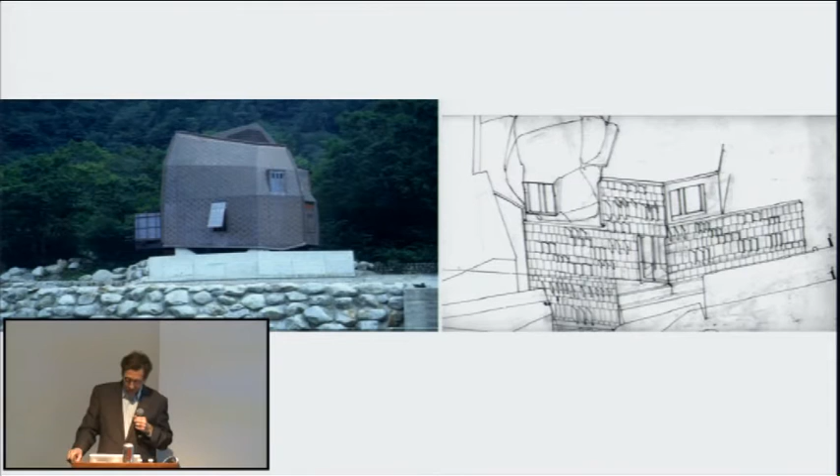In 2004, he was celebrated with the Annie Spink Award for Excellence in Architectural Education, which he received that year, and in 2012 he was awarded an honorary fellowship of the RIBA, and he's currently Professor of Architecture at the Welsh School of Architecture in Cardiff.

In the 1980s, Peter and his collaborators, who included Chris McDonald, Jeanne Sillett, and others, created an iconic set of projects that many of us first learned about the AA through. They were published and widely disseminated.

In the early 1990s, he built his first works in Japan, the Osaka Folly Pavilion and other projects which people in this room contributed to.

And he's back here this week, I noticed, on TS Week at the AA, which is the week in which everybody starts to get technical in their language and expression.

But the point I'd make is I think Peter, probably more than anyone, embodied the idea that a technical consideration of architecture is always and should be embedded in the projects of a studio and unit. Technical considerations aren't something to put off on the side in a department or laboratory, as other schools do, but the opposite: to embed that thinking within a project and a unit. What you're seeing tonight in his own personal work is an extension of a way of thinking and learning architecture that Peter remains a remarkable leader and example of. Please join me in welcoming Peter Salter.

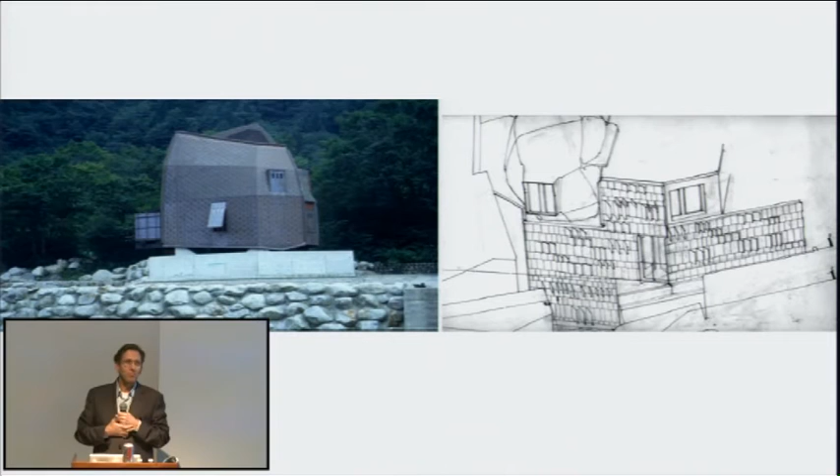Well, that's an introduction. Thank you very much, Brett. I'd like to thank the AA for inviting me to be here. It's very good to be here. This seems more like a reunion than a lecture. I see lots of faces, and it's really wonderful to see you, and thank you very much for all coming.

I suppose I'm going to primarily talk about Walmer Road. Walmer Road has been with me since 2006, when I came back to teach briefly. The client and I would meet in the unit space, and we would try and resolve how to make a set of houses in a kind of high density way, in close proximity. It's been going on since 2006, and I feel like I'm a Baylight scholar in a way.

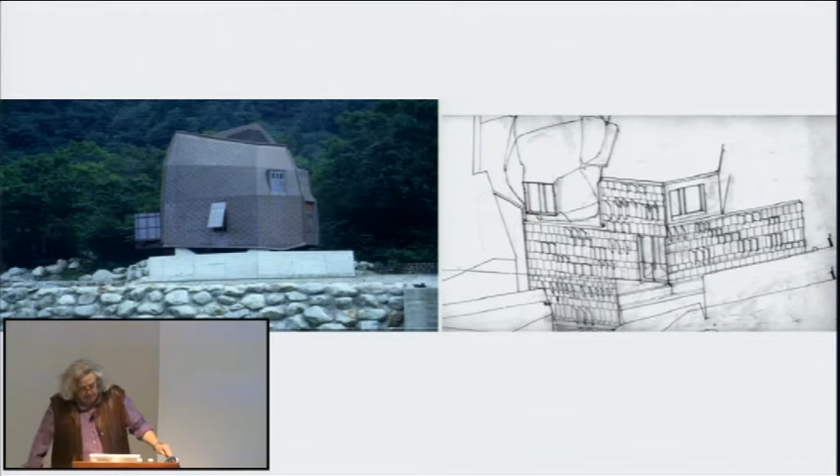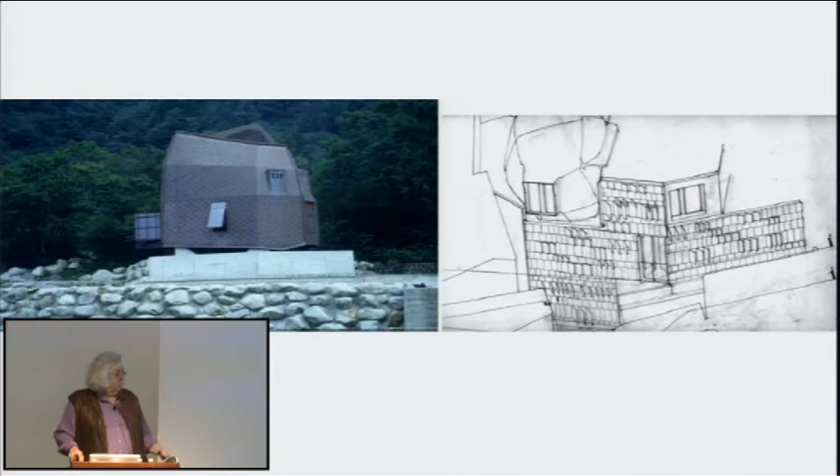Because as Baylight has offered so many students in this place an opportunity to be here, which is an amazing and wonderful thing, Baylight has also given me an opportunity to build a building in this country and to do it differently. The one on the left is Kamiichi Pavilion, done under the Japan Expo Toyama in 1994, and was one of the last pieces done through executive architects in Japan.

So you literally handed the whole idea of strategy and detail over to the local architect, and the local architect made of it as he did. In this job with Peter Beard, it turned out a wonderful project.

On the other hand, Walmer Road, which has taken a long time to come, is a different kettle of fish, because all of the strategies and the details are kind of re-examined. We're working now with the executive architects, Mole Architects, with Hugo Keane, Meredith and Alex. It's a different scene, because you don't just hand over your project. What is wonderful, although Crispin probably doesn't want to hear this, is that it gives you a chance to re-examine the technical aspects of the project, to try and find a poetic in relation to that, and that has been hugely valuable.

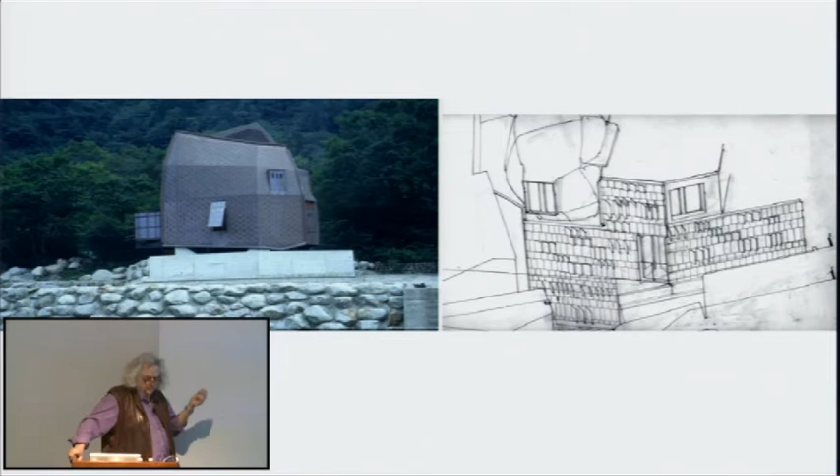So every little detail, you're looking for a kind of poetic or set of rules for it to operate against. It's a very different kind of mindset between the Japanese projects and this project.

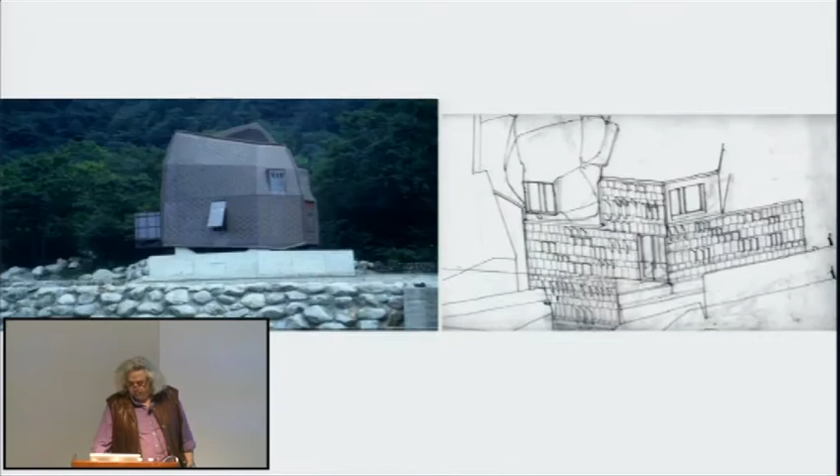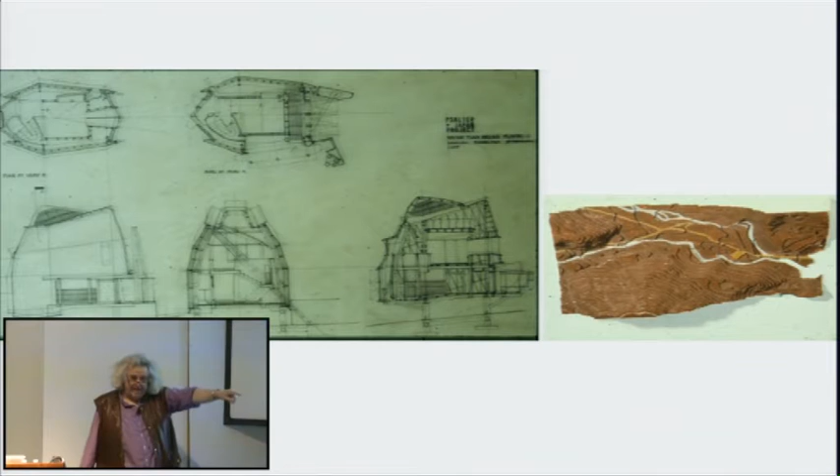Having said that, I'm going to show there are some common ideas that exist between the two projects. I'm going to show Kamiichi because it talks about qualities of light, and the idea of movement in relation to light and view. These are the original drawings, made in Philadelphia in a room. They were sent to London, and then from London to Japan. So there's this toing and froing of handing over ideas and strategies, trying to put detail to it, but you couldn't really deal with it in that way.

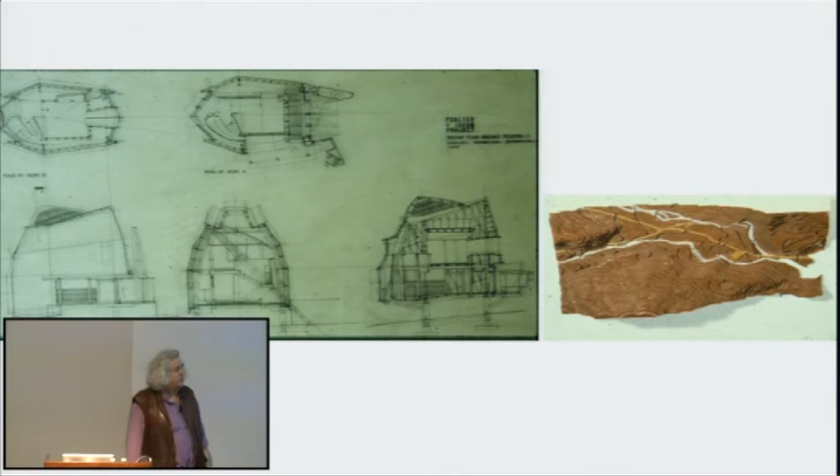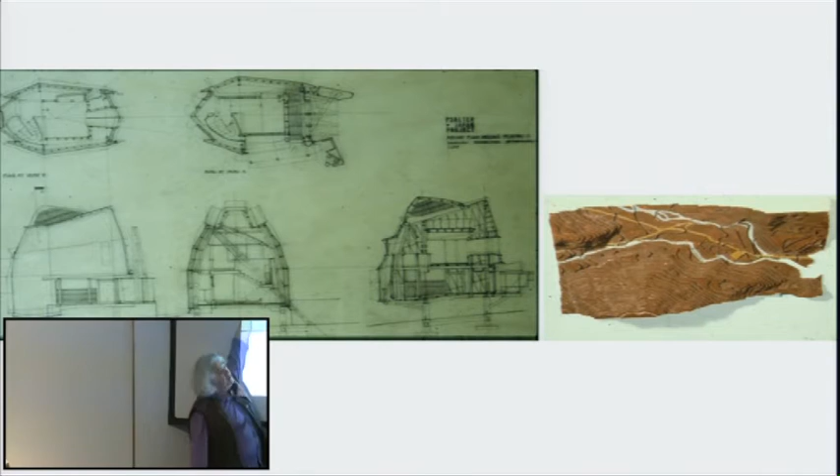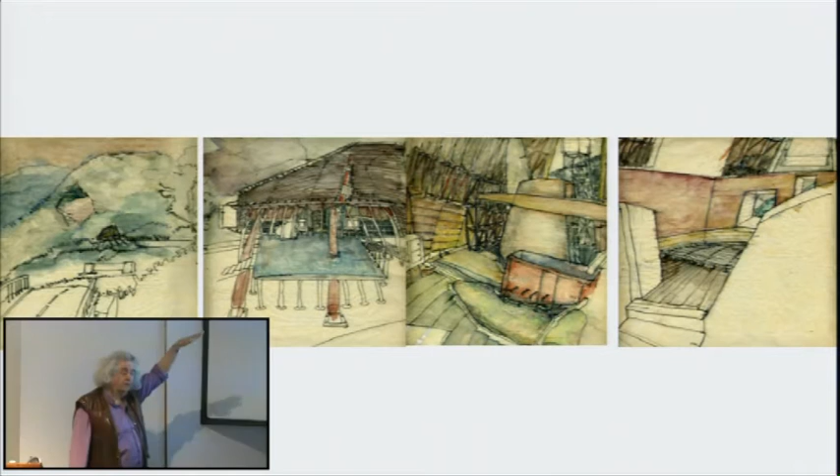Kamiichi is a mountain pavilion. It exists 2,500 meters above sea level in a national park. It's now called Peter's House, which is rather nice, and it's only open from about May to September, because after that it's closed down due to the snow, which gets up to about this height. So you're dealing with extraordinary conditions. The snow is probably 10 or 12 meters high, really thick snow, and the building's 13 meters tall, so it just pokes out the top.

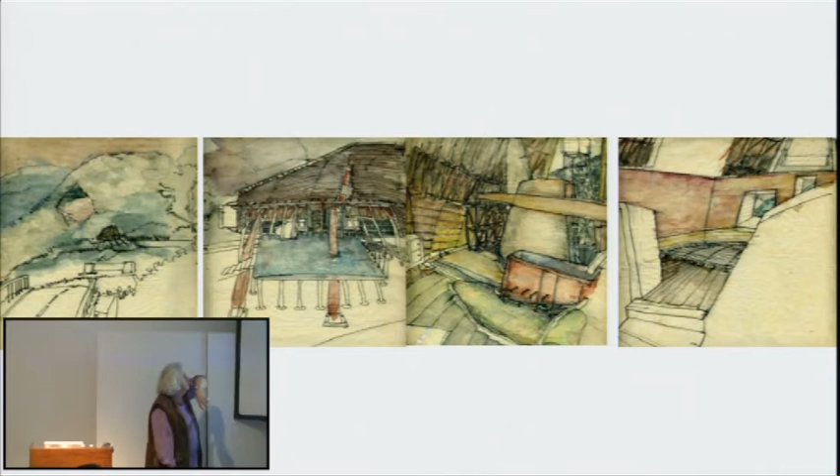When you first see it, you've been driving up in the national park for about 20 minutes, and you first see it set against these rock and wooded hillsides. Then you drive off following the mountain road, and the next time you see it like that. So this idea of viewing it, then moving to it, then viewing it and moving to it again, we start to see in the building. These are some drawings about moving around the space. It has a room at the top which allows you to look at the mountain peaks of Mount Tateyama.

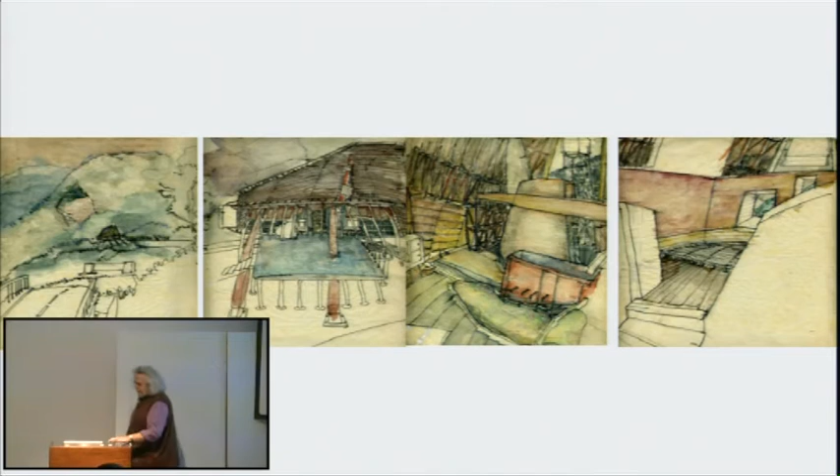This is the building, you can just about see it. This was taken in May, I think. It's right next door to this amazing meltwater river. And the idea of it was to make it two shells, like the shell of a boat.

So it has uniformly distributed loads across the shell, and so it acts like a boat. I mean, it's in snow, but it's in water. And inside the shells is another landscape of construction. And that piece of string measured the distance from the building to the mountaintop.

This was built by a local architect who actually was brought up in the national park, and this is his interpretation of my drawings.

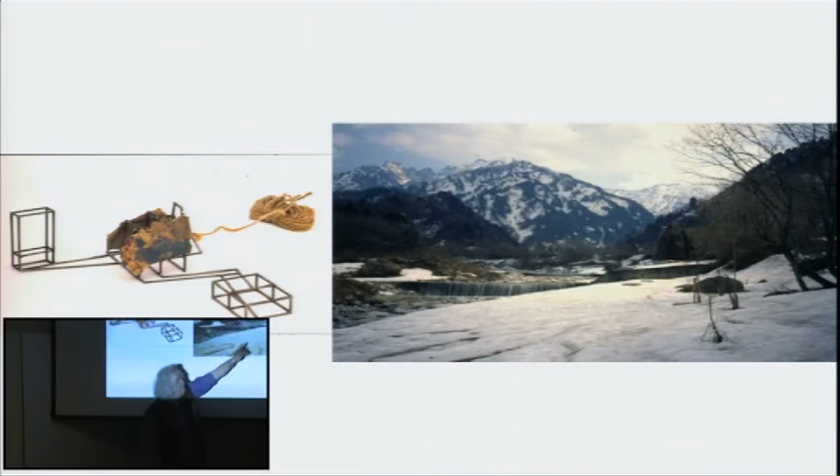So you come to the site, and you go off again, and you find a path to Peter's house, and you end up on a deck on the south side, where a bench enables you to sit and take your climbing boots off and air your toes. And you follow a water gutter into the building.

Sorry, got those back to front. That's the building when it's open in the summer. And in the winter, the townspeople come and take out the crisp packets and shut down the building for winter.

This is the tank which collects the water received from the gutter that you follow into the space of the building. This is the space, the back of the room and the back of the shell, so you're literally walking in the space between the two pieces of architecture.

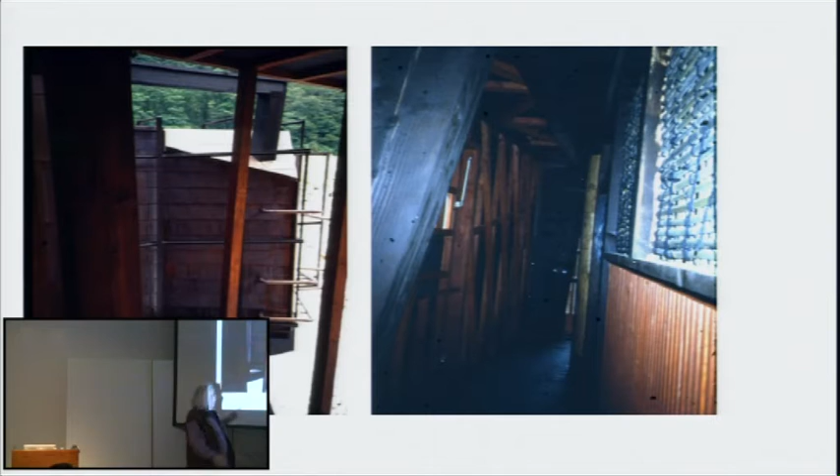And so this idea of walking around things in order to gain length, because it's quite a small building, we start to see in Walmer Road. So we're looking at the fronts and the backs of spaces. This was supposed to be clay rendered, but they didn't do the clay rendering for some reason.

And you would go upstairs, and it's really quite dark. And that kind of sense of darkness and calmness, of kind of absorbency of the dark, is one of the aspects of Walmer Road that I'm interested in. Some of the construction, the black carbonized steel, carries the dark, perhaps in a similar way to this wood building.

This is looking out from the mountain peak. There's a bee's nest there, and there are roosting places for birds. And there's a little furry animal that keeps its tracks going in the snow over winter, and it goes in there in the winter. It's quite nice, so it becomes something other than architecture.

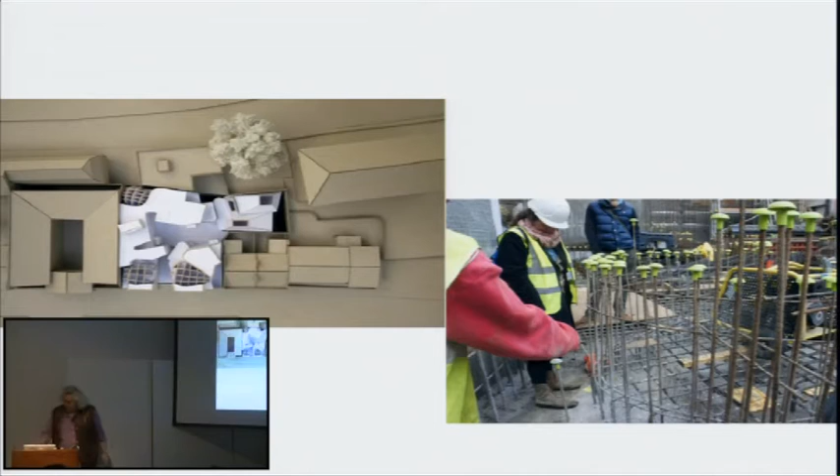This drawing was a very early drawing, and it's a nice drawing, but it's completely deceiving. I caught a cold doing these kind of drawings, really, because in the end I thought I would never do any more of these, but I'm still doing them because I like doing them. But they're really bad news, because they bamboozle you into thinking you've got a particular kind of space. Actually, this space across here on the project is only 5 meters.

So that's between house 3 and house 1. And that courtyard, therefore, is the only set of privacy between the houses.

To get to the courtyard, you go up a ramp and into this outdoor room. This outdoor room is lined with timber louvers, which give you privacy between houses, reflect light into the building, and act as a kind of baffle to sound, because behind the timber louvers is an acoustic render.

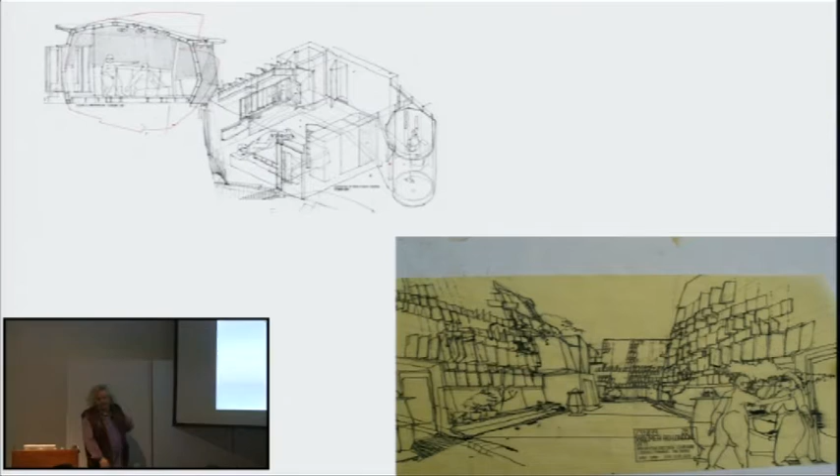So this drawing is a bit out of focus, I think, but it was a compilation. This just shows you how you move up a ramp, a step ramp, into the wood block floored courtyard, and then you proceed into the houses. This is a section, the original section, which shows the two yurt structures on top.

The yurt structures are interesting because they give a change of architecture. It's like going across the leads on a country house, where you walk across the roof leads, and at the top, on the roof, you get these little dining spaces or little rooms in which to watch the moon or whatever you did up there.

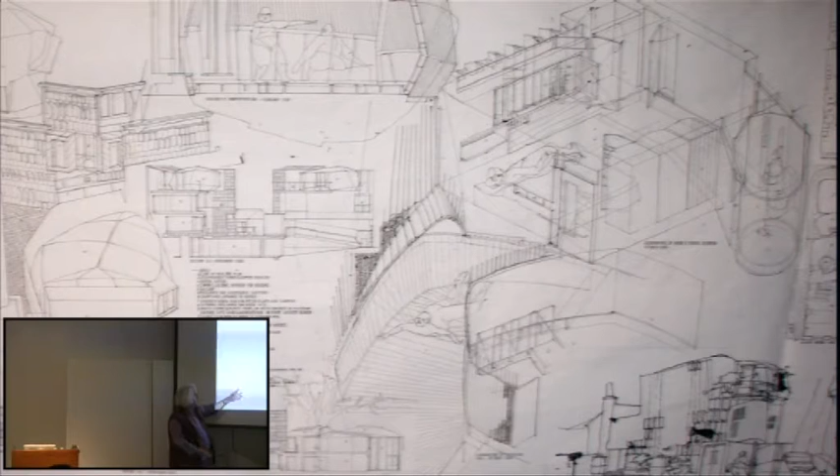And I thought that would be a really nice thing to have in an urban environment. And that's interesting, because there are regulations, planning regs, which say we weren't allowed to go higher than the surrounding building. And so the architecture has to be manipulated to accommodate this total floor height.

And so most of the bedrooms, which are quite squashed in their floor-to-ceiling height, give the room back to the top floor, where the main reception rooms are, and to the ground floor, which is more like maybe a home office or something like that. So these two rooms are the more public spaces, and the private spaces are in the middle.

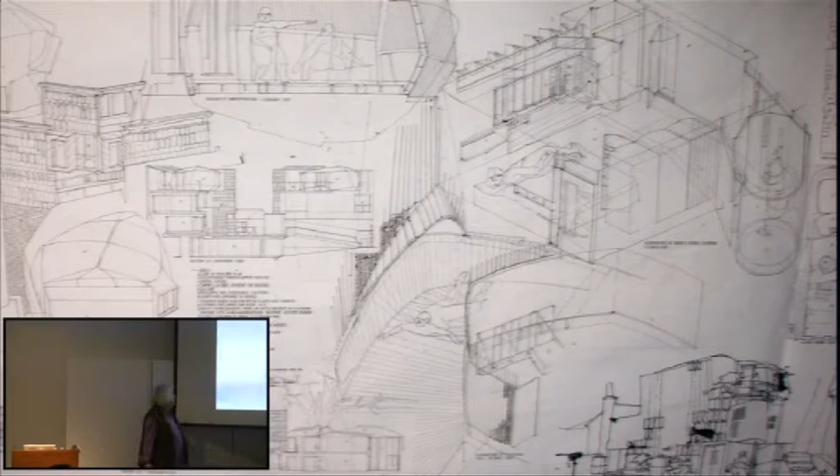So if you're walking up to the top of these buildings, the architectural vocabulary changes, and maybe there's a greater sense of release about that.

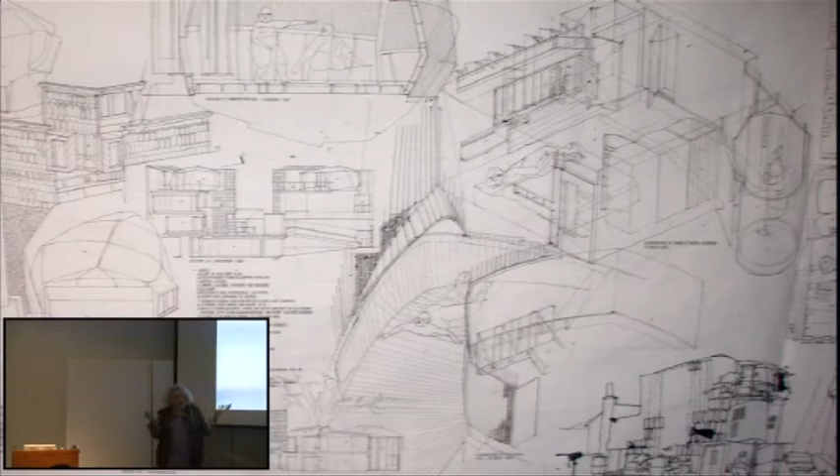This is my planning permission drawing, and this is Mould's drawing. And I think it's quite interesting - this was done in 2006, and this was done in, maybe, 2010.

Here you can see house 4. This is the basement area. This is house 1, house 2. And you can't see much of house 3 because it occurs mostly above ground.

But the garage - this is a garage which the estate agent said you had to get a Chelsea tractor down, which is a big Land Rover. So you have to have enough ramp distance and height in order to get a big Land Rover down it. And so, now I always liken this to a 747 landing - I don't know why.

And so the ramp has got cut marks in it, like you have on an aeroplane runway, and it's got little blue landing lights. And you land literally on a turntable. And the turntable points you in the right direction to where you can park your car.

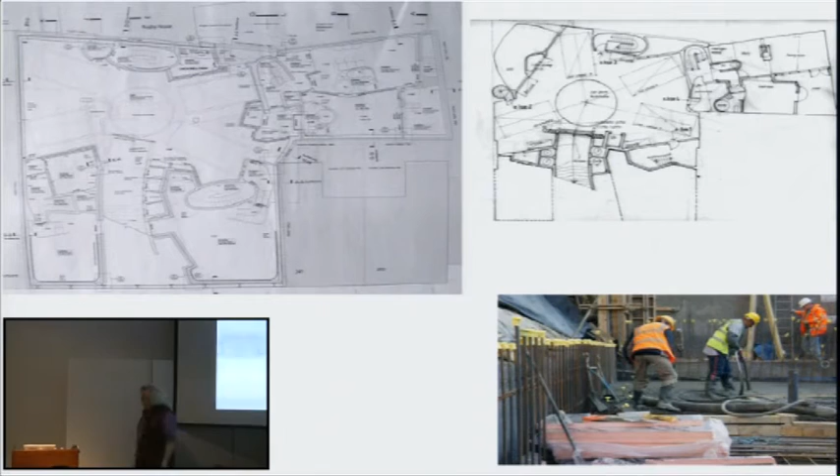You notice that these two rooms are new. These are now media rooms, which go even deeper than the car park level. So we're going down maybe 4 or 5 meters into the ground.

And this is the ground level. This is the main level, from which you access your property. God, I hope that's not mine.

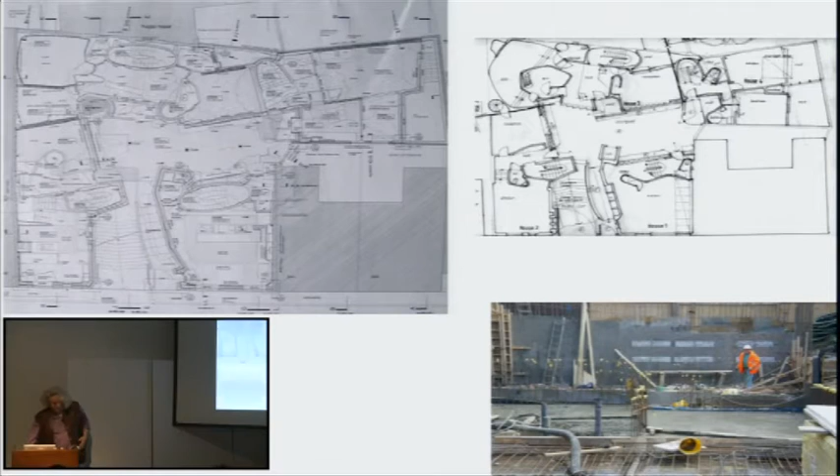This is the bedroom level. This is the level where things are slightly squashed, where the ceiling heights are low. And you can see that this is the level that's got quite a lot of these re-entrant pieces in order to make private space, which is sunlit, for you.

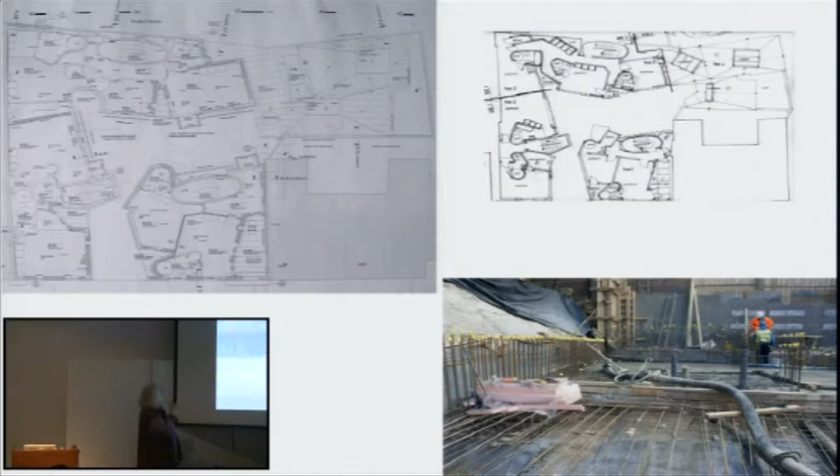And then we come to the top floor, which has got the yurts on it. And you can see that we're still playing with the position of the yurts there. And meanwhile, these guys are pumping away.

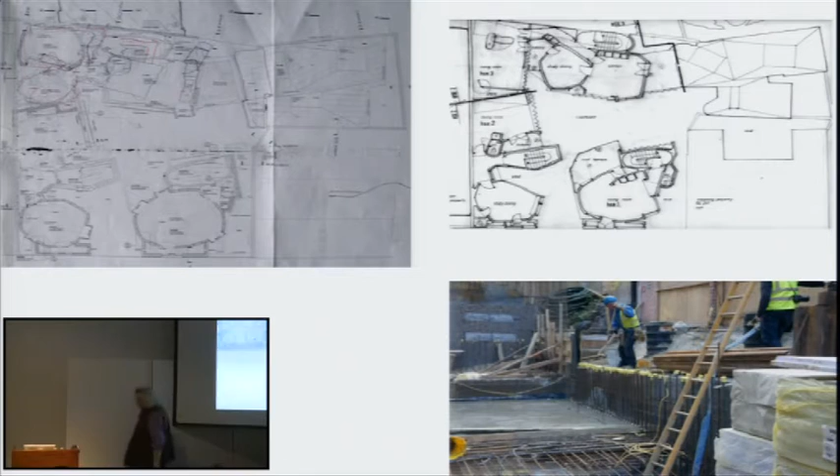The bedrooms are the things that I'm really interested in. And the bedrooms have an in situ concrete wall that faces onto the courtyard.

So you can think about the courtyard as this wooden room, and it has its skin, and it backs onto a concrete-faced room. If you live in the Barbican, the idea of living in a concrete place is fantastic because you have no airborne sound. It stays within the room, so you can hear yourself snoring. And so the idea of doing in situ concrete like that works with that idea of providing sound and quietness.

The room itself is like a kind of patchwork of different finishes. So there's in situ concrete, and I'll talk to you about that later on. There's clay boards, and of different colours, just as in this - this is from Katsura. And there's even perhaps bits of gold leaf, although we haven't discussed that recently.

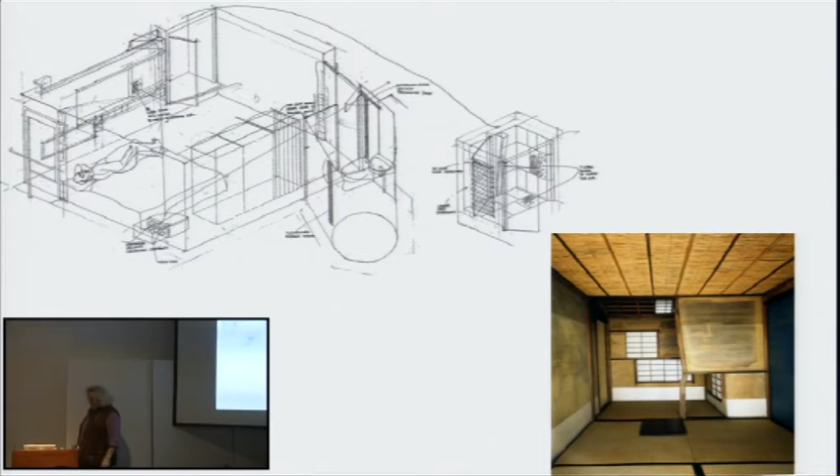So there's a window, there's a window to look out of when you're sleeping. There's a window, a big timber window, which on the right-hand side there has a shutter on. And that shutter, if you open that up, you're confronted by a slab or slabs of tufa. It reminds me of being in Japan in the Hilltop Hotel, where the owner was somewhat eccentric, and he said that everyone who stayed in his hotel had to have good, clean air. And so he put this kind of really weird piece of invention which cleaned the air for you. It was before air conditioning - this was built in the 1920s.

Hopefully this piece of tufa will allow and clean the air coming in so that we don't get all those soots of London coming in. And the timber window, you can see, has shutters on the outside, and they can be turned and manipulated to receive the light. And then, because there's a box there, which is a kind of sitting box which you can read by, and that has a window, clear window, not covered by shutters, and which was asked for by the client.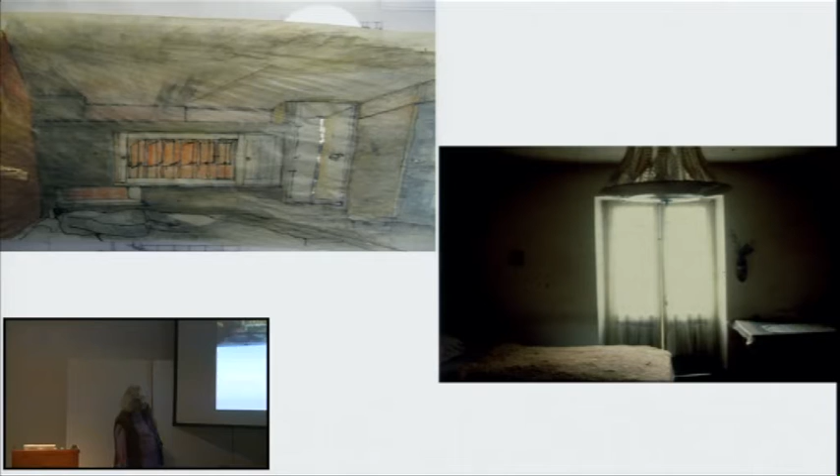This detail is of the black steel we'll talk about in a minute, but the black steel are basically all of the bathroom objects that sit in the space, which modify your movement and absorb the light.

And it's sitting next door to a clock. When you look at Hogarth's paintings, like Marriage A-la-Mode and things like that, you start to get gold and brass work, particularly with clocks and door handles, that reflect candlelight. I really like that idea. So there's the clock with the little gold top, and the light fitting with the gold leaf or brass behind, just reflecting slightly in the space.

So hopefully it will start to be like an 18th century interior. Whether it will, I don't know, but this is what we're going to try and get at.

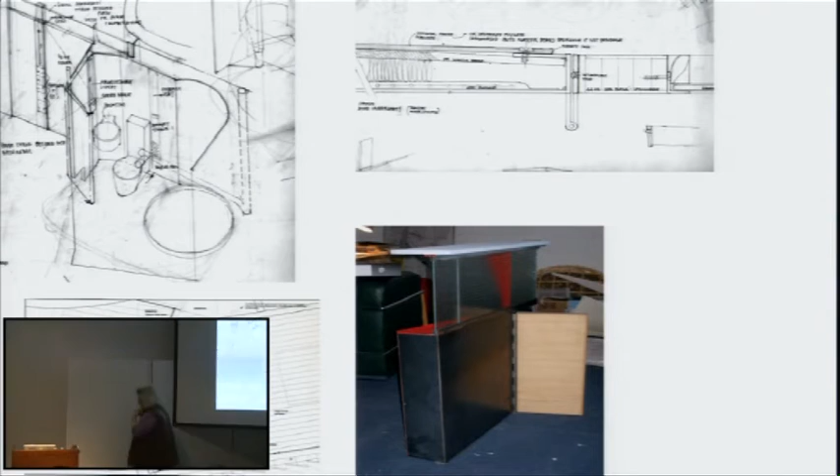This is the other one, the prototype. You can see it's kind of agricultural - I quite like it, it's tack welded. Jamie Faubert told me about this. Jamie Faubert has been fantastic - we keep going around to see him because he's the expert on black steel, and so you try not to do anything to this. This will be finished with beeswax on the outside, and you're trying to keep these kind of blue-black pieces.

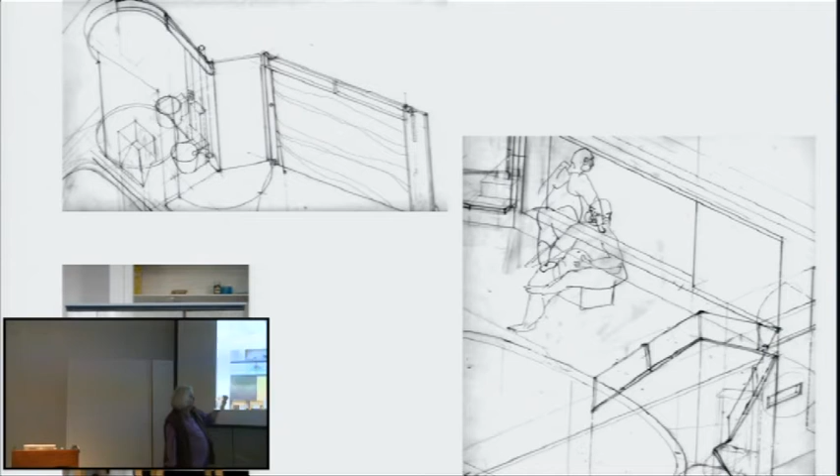This is the reason why this is so silvery - Hugo told me it's because we're using the wrong grade of steel here. We're using only 3mm steel, and we should be using 4mm. If we use 4mm steel, we get a different color of carbonized steel. And I sit there on the train, on the station at Cardiff, waiting to go home, and I see these rolls of black steel coming out of Port Talbot past me on the train, and I always think, God, they're lovely and dark. Why isn't mine darker?

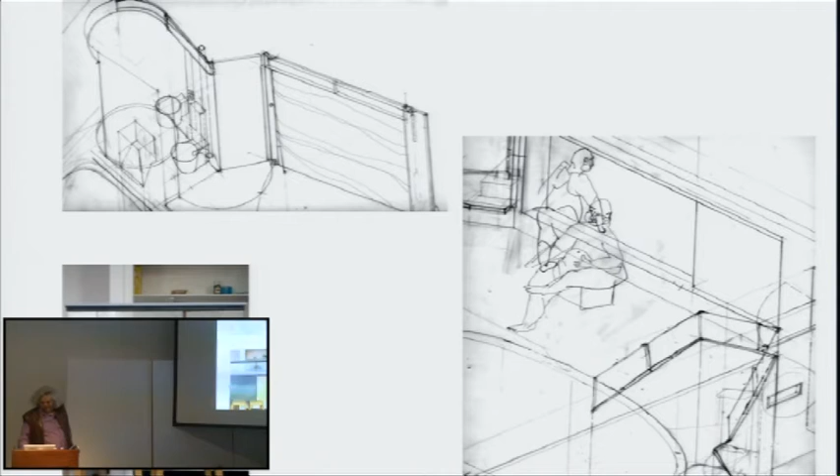Okay, now the prickly subject of the concrete. This is the drawing that I made for this wall, and because the light's coming from here, this wall will be darker.

So what we've tried to do is vary the formwork. This piece and this piece here are grained wood - we're actually using a birch face ply. And at the top there, because this is all one slide, where the formwork ties are, is phenolic face formwork.

I'm not an expert in this - there are many more people who know about it than I do. But phenolic, because it's so smooth, reflects light differently, whereas the birch face plywood, because it has a raised grain, casts shadows. So it has the effect of making the wall darker.

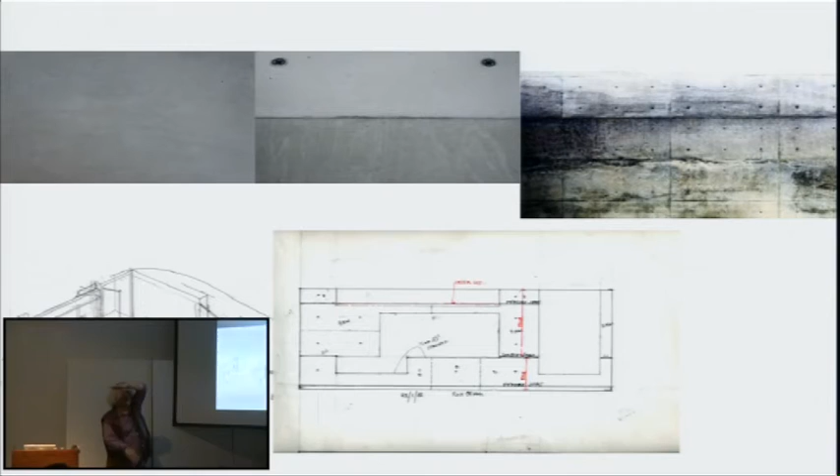When we cast the wall last week, there was one very beautiful cold joint like that. Unfortunately it's quite high up in the wall, but it is very beautiful. So the contractor, Darren, we're now going to try and bring the cold joints down. There are other drawings where you can see lines going across here, which are my version of cold joints.

The other thing is the tie plugs. The normal ones used in Britain are like 45 millimeters, and I thought that was too big for a domestic situation. So we've now had some new tie plugs made, which are 32 millimeters - much smaller. But even the Japanese ones are even smaller still, down to about 22, something like that, which are timber and they're unscrewed.

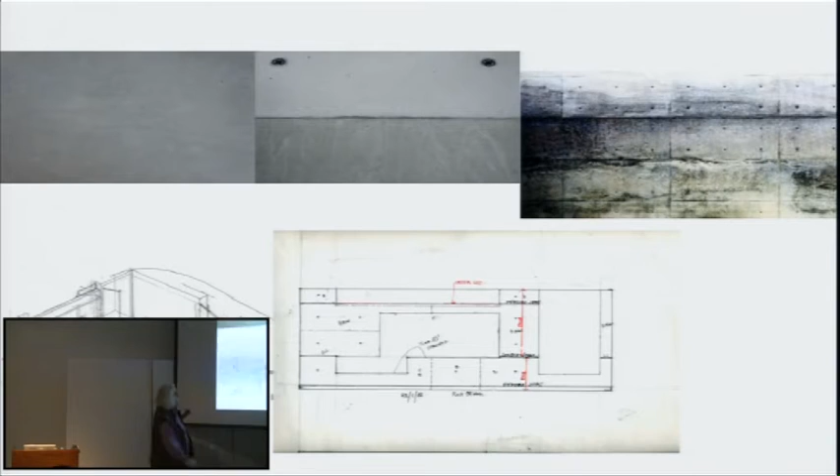This is all Naoshima. Darren knows this - you've got the book, like I have. And this is we're trying to reproduce this reflection on the ceiling.

Whether we will, I don't know. But what we're trying to do is not to have any joints in it, because there was a discussion about the soffit of the slab, whether you see all of the timber joint lines, and whether they should be big or small. If they're big, then it's less fussy, which is quite nice for a small room, but then it changes the scale. So there's this whole kind of desperate conversation about whether the joint should be big or small. You can tell I'm getting a bit nerdish about it. And so in the end we decided that we'd have no joints.

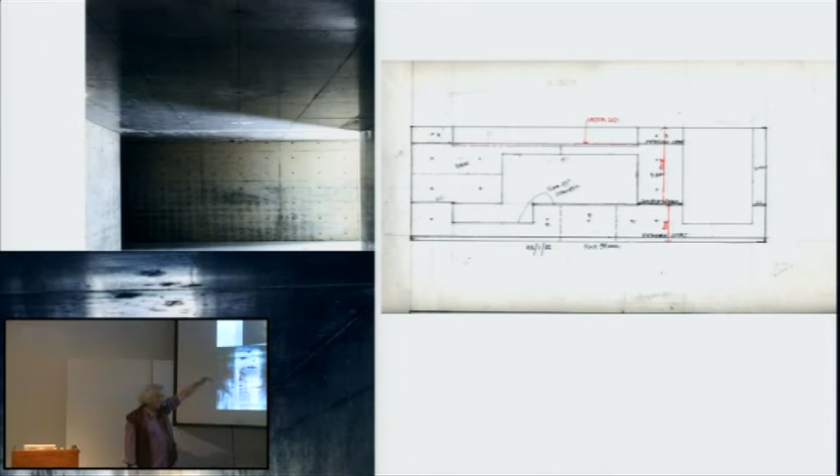No joints, no bloody smoke detectors, no lights, nothing on the ceiling. So that all you get is the light on the ceiling. And we're doing that hopefully with some form of formwork liner, so that we won't get things like this - although these are quite beautiful - we won't get joints like that or like that, but we will hopefully get the light.

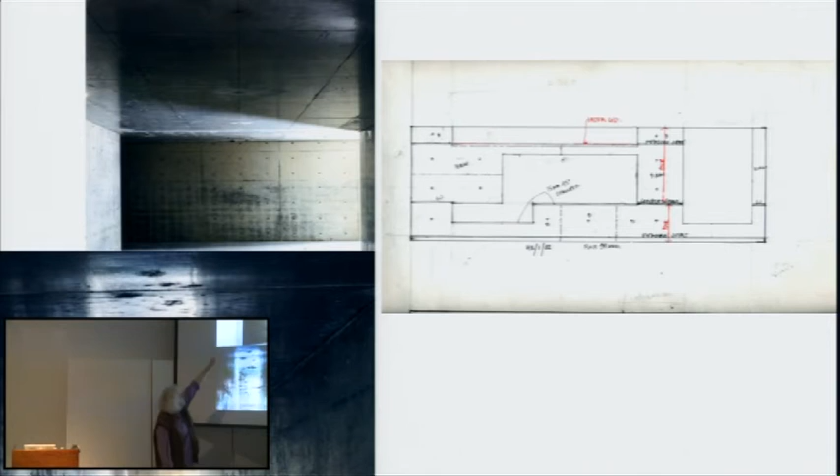You're not finished with concrete yet. The other conversation about the concrete was we want to use an additive, because if you keep using Portland cement, it's very bad for the environment. So although we want to have the concrete because it has good thermal mass, we don't want to use so much cement.

So the idea was to replace it in part either with a PFA, pulverized fly ash, or a GGBS. This is PFA and this is GGBS. And they both are at a mixture of 20%, I think it was - quite low amounts. In PFA you can use it up to 40%. In GGBS you can use much more, like 60%.

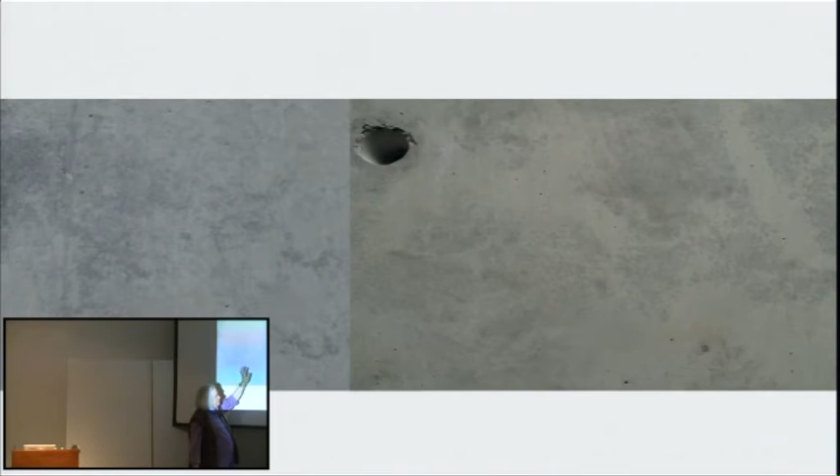So we spent weeks trying to decide this, Fenella and I and Hugo. And then Darren came along and said, well, we don't have a batching plant that can do PFA. So that made the decision - we're into GGBS. So then there's a whole problem about, well, how much GGBS?

So you look up the Ando book again, not convinced by that. And I spoke to Gerard from Grafton Architects, who uses GGBS, used it in Ireland. He originally specified 50% GGBS because he wanted virtually white concrete - 60%, I think he used. But it was coming into winter time, and if you use GGBS, the curing time is much slower. So he took his down to 30% GGBS, and he said it was pretty wonderful. So we're using 35% GGBS, and that's the decision.

So we spent quite a lot of time on these kinds of drawings, trying to achieve this kind of thing - you know, what happens if you put black sand in it? Can't afford black sand. How do you get cold joints? Very difficult to achieve. This is the concrete drum for the staircases.

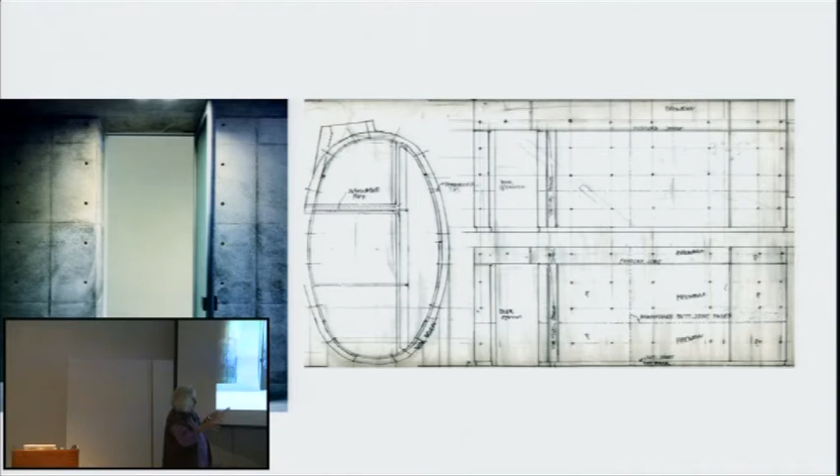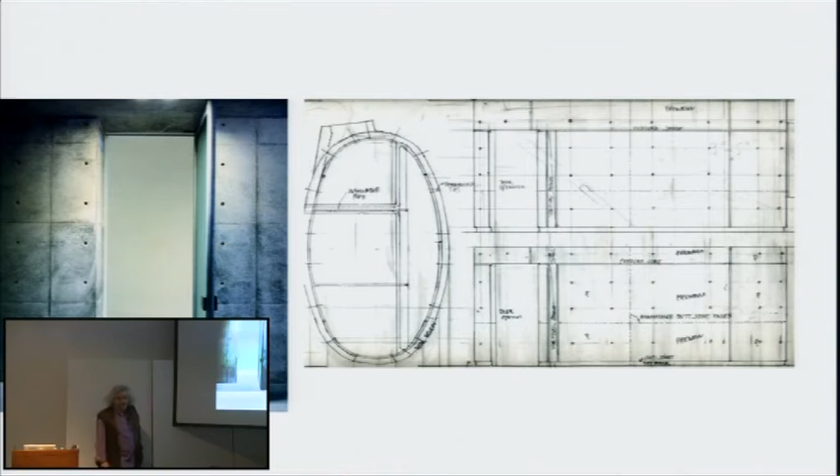And on the inside, it's finished in birch face plywood. So the inside gets its light from the top, hopefully will have shadow, and that will work with the black steel staircase. On the outside, it will be phenolic, so it will be very smooth and hopefully more reflective - so hopefully it will just pick up the last light as it comes from the outside section of the house.

We're using these very beautiful glass prisms in the concrete work. Hopefully in this kind of shadowy concrete, we'll get these areas of light. They're deck lights from a yacht—we're using these, and that's another story, that's later on. So all the time, unlike in Japan where you ship the drawings and have a meeting to discuss the detail in relation to the strategy, here we're re-examining every move made in the house to try and find some kind of poetic understanding of it.

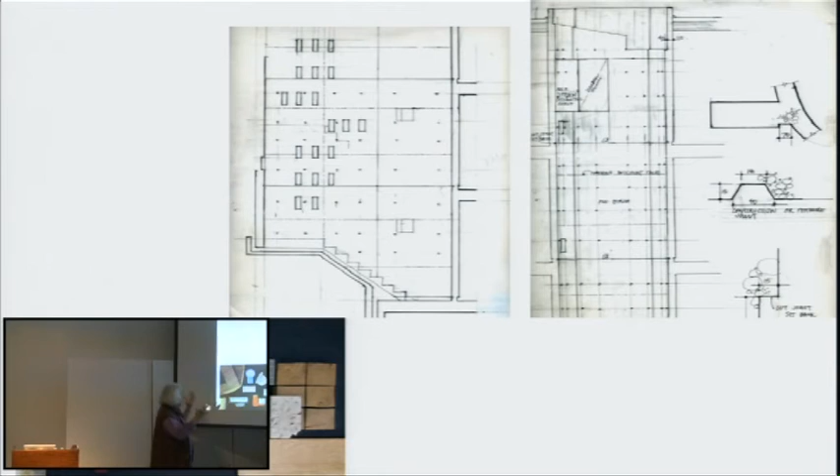Including the floors. This is Carlo Scarpa in Venice, I think it's a kind of courtroom building. What's so beautiful about it is this amazing floor, which in his case is travertine marble—in our case it will be concrete. Then onto the floor you put these timber rugs. So in all the rooms, you go into the room on the concrete, then step up onto the timber rug, and it's like you've arrived. I haven't really talked about structure, but most of the structure of the building is made of quite thick floor slabs, so the loads can travel wherever they like, because nothing lines up except the staircases.

Now, I hate screeds—Liz will know I hate screeds because we had lots of arguments about it. But anyway, the floor has got some recesses in it in which we are seeding the floors. We're putting additional brown, rather than white, brown and dark gravels into the seeding. This was a diagram—then what happens is you sandblast it and grind it down so you start to get these kind of fossil-like pieces in the concrete. They'll go through all the circulation areas and in the bathrooms. As soon as you enter a room, because the building's quite cellular, like a series of little warm cottages, you step up onto the timber rug and you know you've arrived.

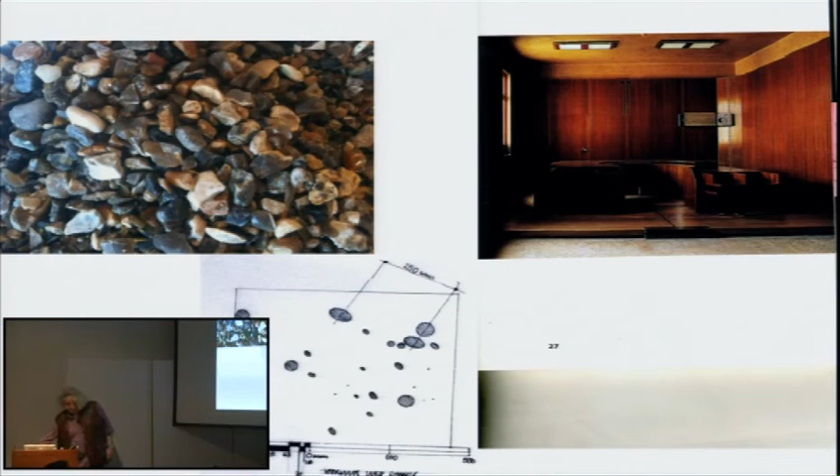More concrete. This is the drawing—I really love this. This is Carlo Scarpa, of course, his board-finished concrete. I always thought it had either been sandblasted or had some kind of retardant put into the formwork so it starts to lose some of its board marking. I really like that. I've only now found out that it's boucharded—it's been hit with a hammer to get that, so it's knocked off quite a lot of the board marking. The only thing I didn't like is that it's very big boards, and most board marking you see is on quite big boards.

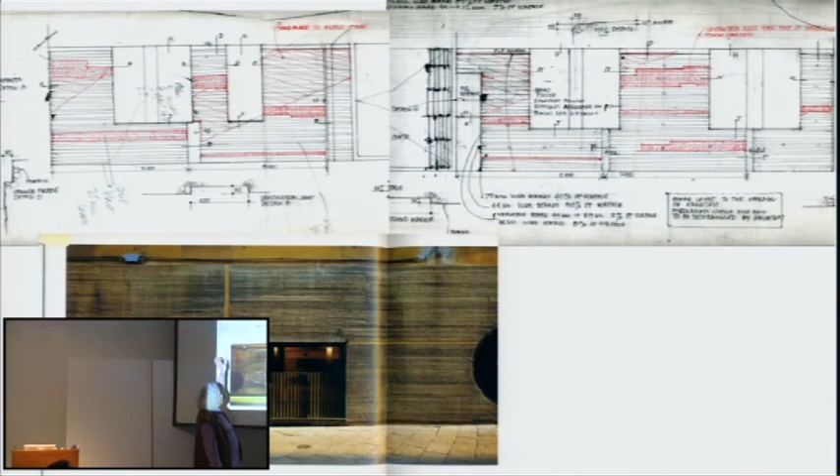So we're using much thinner boards because it's a domestic scale building. This is a drawing which attempts to show the amount of boarding and the differences in the boarding and the depth, because it's also got—I really like these pieces here which are sort of indented—so we're trying to get that indentation. At that point I was also trying to sandblast it, just at the same angle as Carlo Scarpa, but I don't think we're going to sandblast it now. We might have to do something else instead, yet to be determined according to samples. So this is a drawing really about looking at the board marking for the front elevation—this is the ground floor of the front elevation.

What's so nice about this slide is that the formwork is actually redwood formwork, which is what we're using, and it's been wire brushed, so it's really bringing the grain out. Hopefully when you walk along the side of Walmer Road, you start to see the grain and the kind of slight modulations on it.

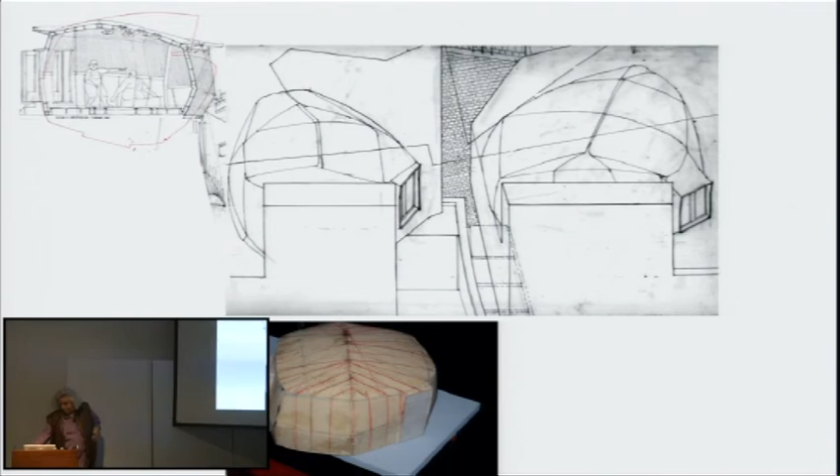I made the model and then measured it to make the drawing. These are two of the yurts. That's my planning drawings with two of the yurts.

And this is a model - actually not of a yurt, but by a student from UEL a long time ago who did this cold moulding that I was interested in, I am interested in. It uses very thin layers of timber which are counter glued and pinned together. They use it for racing dinghies, because it's very light and much better than carbon fiber.

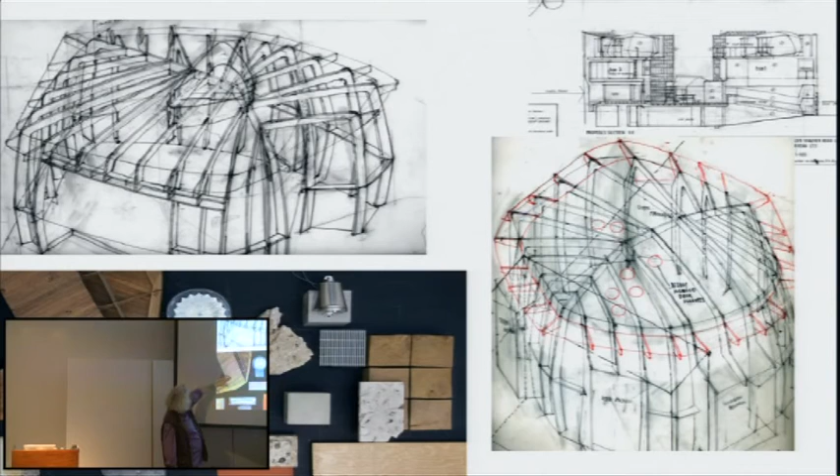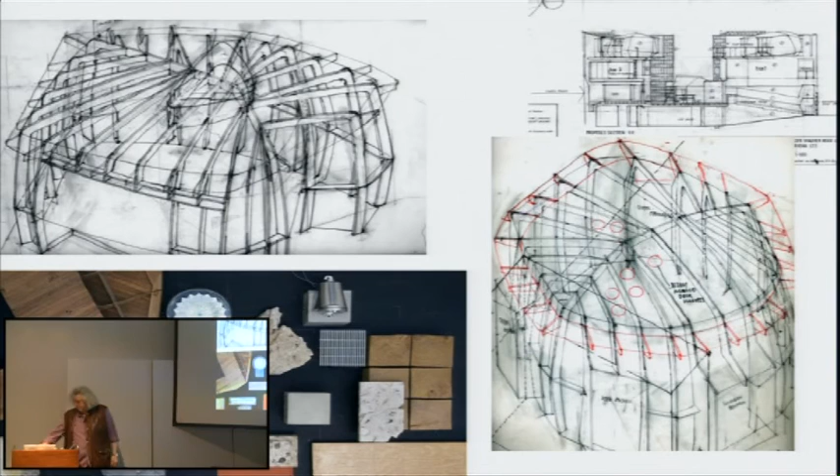This is the sample board, so I won't go to that for a moment. There's the rhino, the dreaded rhino model. Looks nice.

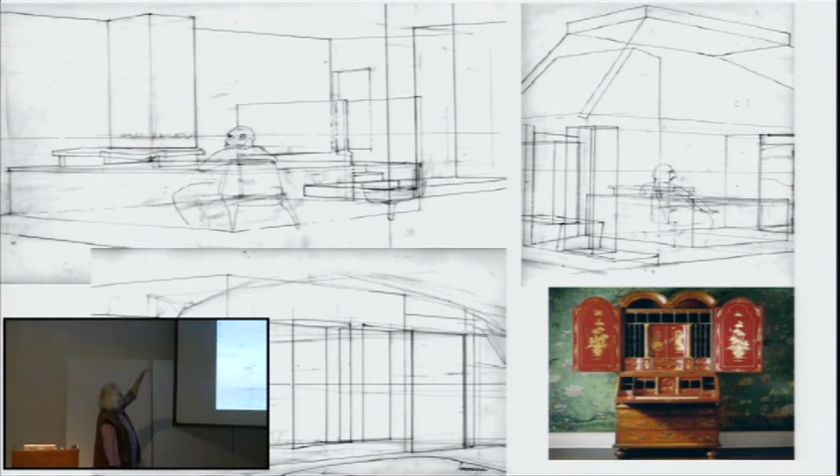These are drawings that I did, just really more accurate perspectives. I don't really do perspectives - I find them hard to do. But these ones were trying to be much more precise about levels and quality and sort of feelings of the space. And the kitchens...

tried to have tabletops which are at normal table heights, and then onto that, just like a kind of Chinese bureau - this is the normal height, and then the working height is above you. So onto these normal tables are placed these little trays, these big trays, like the kind of pieces you get in a temple, where they put vases of chrysanthemums or whatever it is on them.

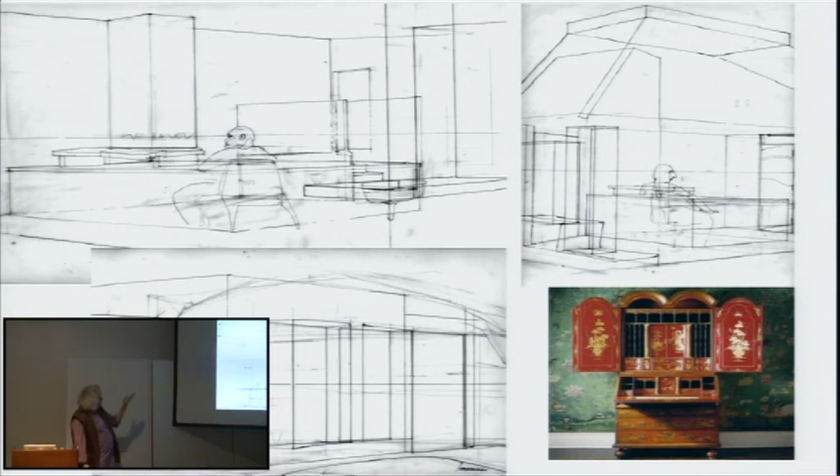And these would become the cooking units and the sink units, so that you're not - because I hate kitchens where you have to sort of wobble on a stool because the bench height is somewhere up here. So the whole of the kitchen has these more civilized, in my idea, table units.

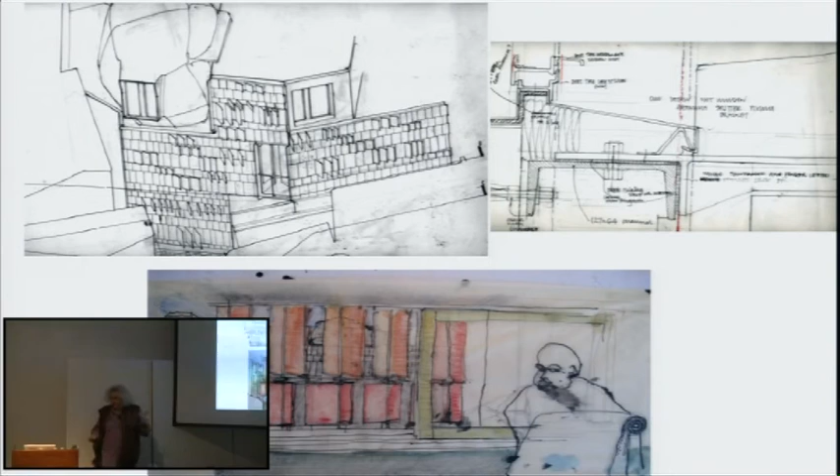What I didn't explain about the bedrooms is this idea of coming out of the staircase lozenge and having to move around components which are sitting in the space - those are the black steel components, these light-absorbing pieces that you move around.

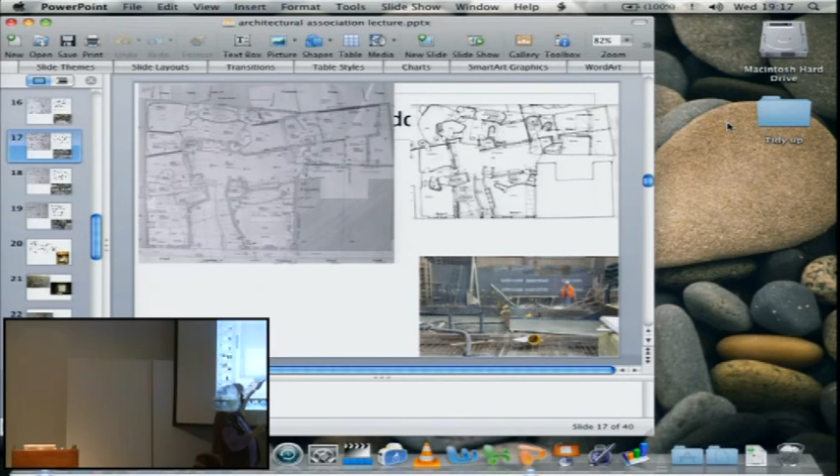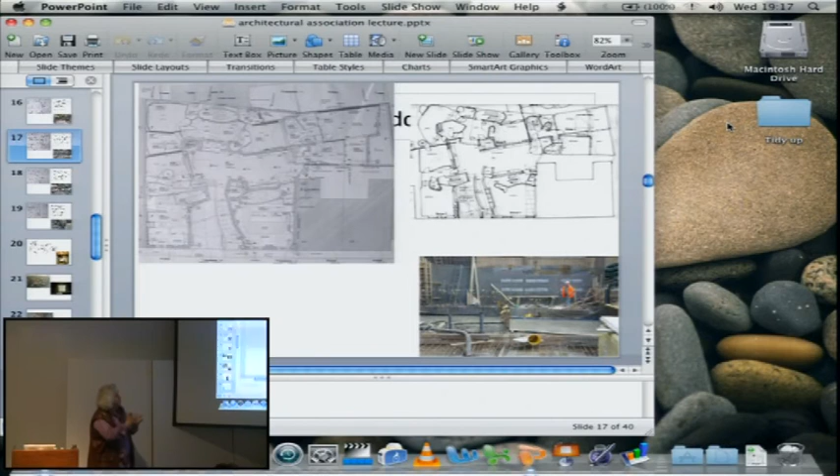I was thinking, these aren't really family houses - you don't have children running around. But they're for people who want to live a more discreet life, let's say. So this act of having to move around pieces that shelter the room, by this movement, offers that sense of privacy. And you find that in relation to the...

So the gutters are like Enric Miralles - Miralles was fantastic with gutters. I thought, when you look out your window and look at the gap between the louvers, you start to see the sky, and I didn't really like that. So I thought you'd have a nice big copper gutter to stop you looking up.

So the copper gutter and its downpipes just run across the surface, and sometimes across the windows as well. You'll see a bit of copper going down, which works in relation to these bathroom pods, where because of the glass, you also get cast iron drainage pipes running through. So you'll see odd bits of pipe - some copper, some cast iron. Anyway, that's that.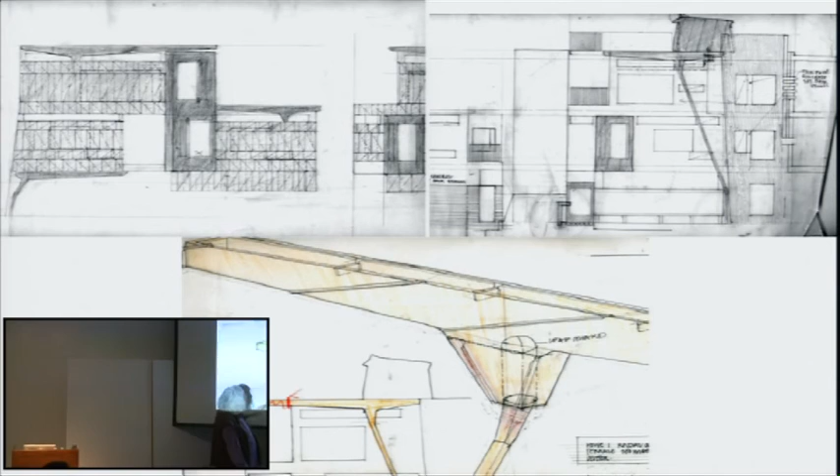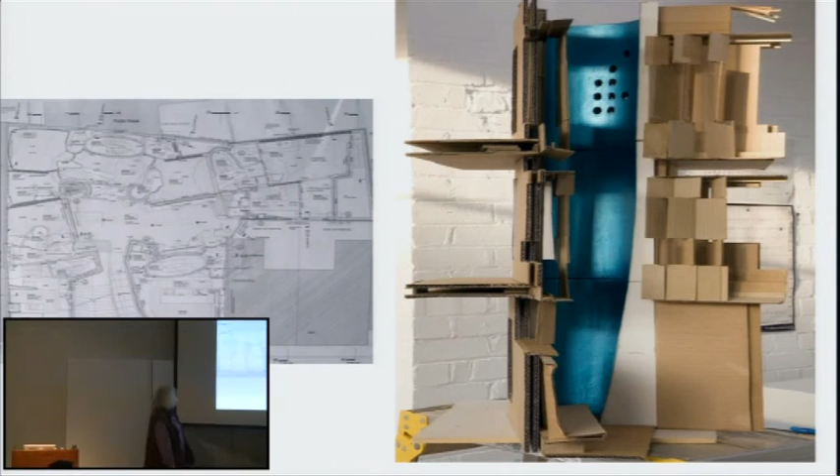This is the snorkel that's trying to relieve the corner - the corner's very difficult to deal with. So what we're doing is making an in situ concrete snorkel. It's shaped on my arm, so it looks like that, at the top and at the bottom. We'll talk about the colour of it in a minute.

So now, this is the last slide. I just want to talk about the colour, because Fenella and Anthony Malinowski, who are doing the colour collages here, worked on the colours of the courtyards, which are behind, in some places, behind shutters. This was a model made by students, which was then painted by Anthony and Fenella.

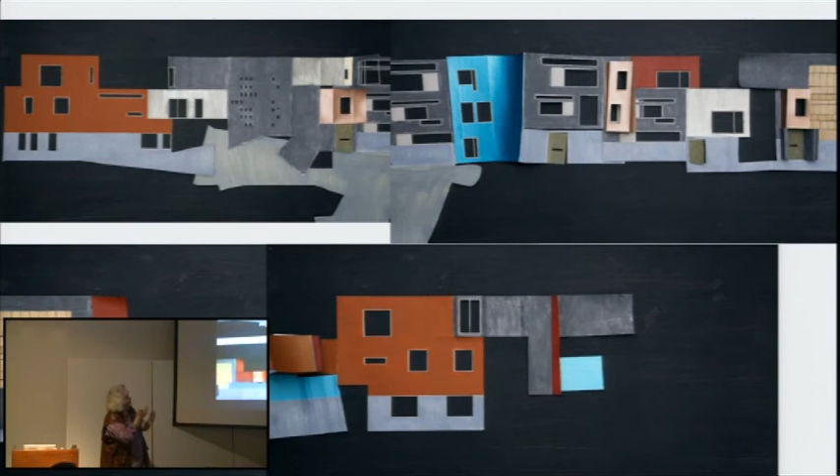What's weird about this drawing is because I flattened it all out, but actually when you start to put it all back together again, you get very odd sets of relationships between the different colours. Quite a lot of them are metallic colours, so you're going to get light reflections off the metallic colouring from one side of a property reflecting onto another, because some of them are quite close, particularly by the entrance to Walmer Road - the houses come very, very close together. So the kind of light quality or light bounce between the houses is what we're interested in.

And the light snorkel, I think, is that one up there. As I understand it, it's blue - Korean blue colour, temple colours. And the grey is the acoustic render, which will have the timber shutters over the top. So where it's more colourful, there are no shutters, and where the shutters are, it's much more simple and plain, keeping the natural colour of the acoustic render.

The outside, I think, might be a little violent colour-wise. So what we might have to do is start to think about maybe using crushed brick dust or something like that rather than a pigment, so that it's more settled. And this is the place where that amazing board-marked concrete will be. Thank you very much.

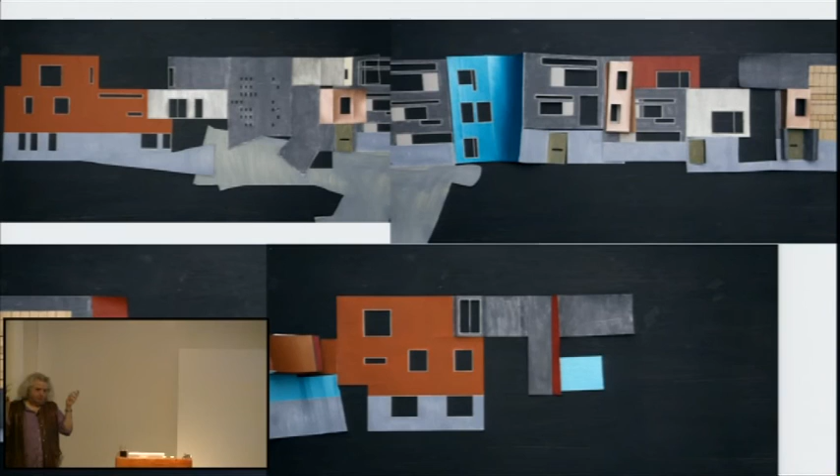Has it given you new topics, new ways to revisit the familiar? Yes, absolutely. That's what I was trying to say with the Japanese projects - you did your design drawings, presented them to the town hall, to the mayor through an interpreter, did some details, and that was it. I spent maybe a year, not even a year, and then the job was built, and you accept its wonderfulness and its not-so-wonderfulness. But in this job, it's not really a job - it's a kind of research, a conversation, and a chance to re-examine every technical aspect of it.

The client's looking at me still.

All the technical aspects of it, to find something other than that the wall has to be 200 millimeters thick. You're trying to find qualities out of technical readings of it, and you're trying to set those technical readings against the strategies that you set out for yourself. It's a complete and wonderful luxury that architects really don't have.

And it's not luxury, it's fantastic for me. It's become part of my being because it's been with me so long, and I don't know what's going to happen when it's finished, because I don't know what I'll do. Go and play with train sets or something. I don't know. But I really appreciate having the time to do this, and Crispin knows that I'm slow-brained, unlike him, but we make it work.